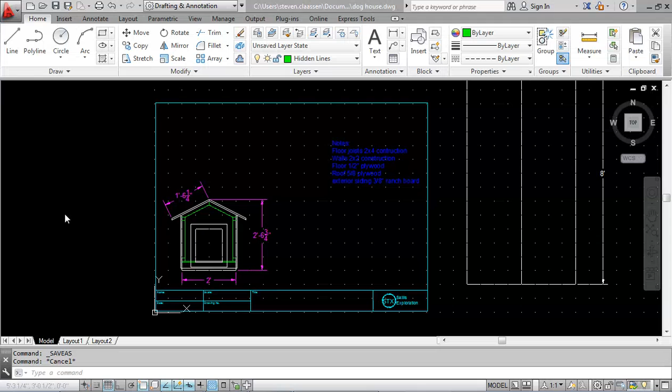This is the third part of creating a drawing for a doghouse. In this drawing, we're going to draw the side view of the doghouse.

First, to get started, I've figured out and finished off some of the inside hidden lines. These are like 2x2s that are going to be used to build the doghouse. You can see there's 2x2 walls here and a 2x2 to support the roof up there. Now you can add these in, and we'll talk about these in class as well.

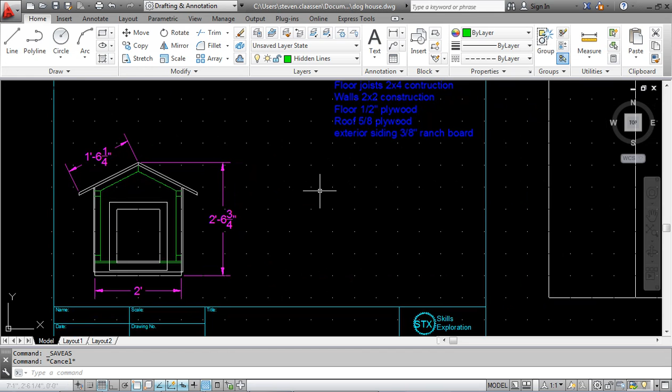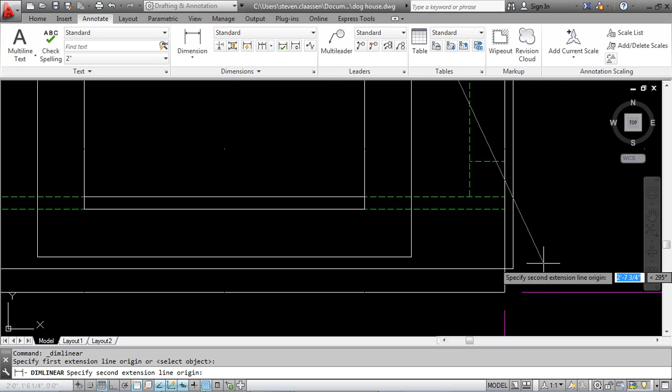So the next part is, how tall is this right now? Because we're going to go back to our sheet of plywood for a second. I'll switch over to dimension line, go to annotate and dimension linear. I'm going to grab from right here at the top of, or the inside of the plywood, and go down to, careful here, I want this line right here because that's the bottom of the plywood. That's going to be used for the siding.

So there's 2'5", that is 2 foot, which is 24 inches, and 5 inches, so that's 29 inches. Let's just put that right there, and we'll take this one here and move that one out a little bit further. Why is this one important? Because when we use a sheet of plywood, we don't want to waste the plywood. So 2 foot 5 inches.

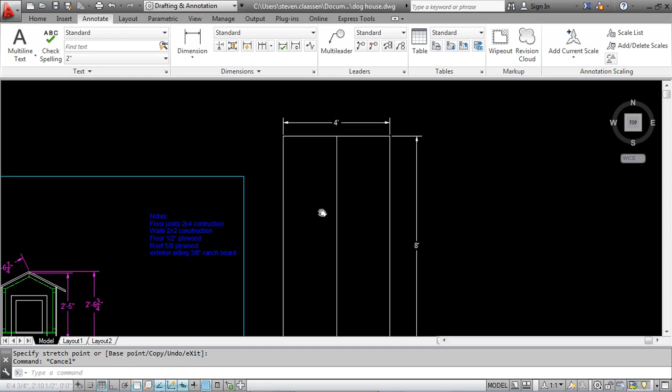So I'm going to come to my sheet of plywood and type in offset, and it's going to be 2 foot 5 inches. I can then take this piece of plywood, this here, and go to here. Now I'm going to label this and just type in text and specify start point right there, and it's going to be 2 inches high. I'm going to call this one the front.

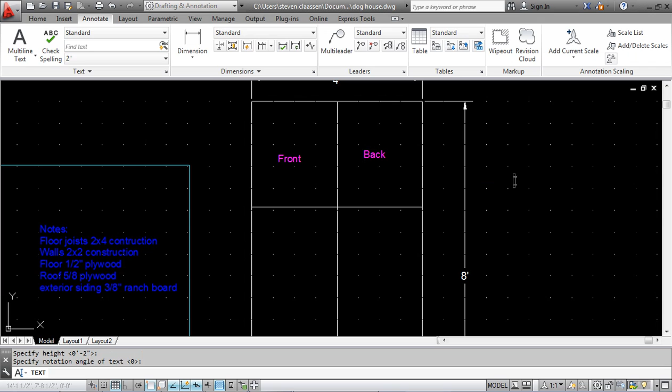I'm going to do text again right here, and 2 inches there, and I'm going to call this one the back. What I'm also going to do right away is just dimension it. Let's go to dimension, and from there to there now is 2 foot 5. So 8 minus 2 foot 5 now, that's how much less we have.

Now, what else is coming out of this sheet of plywood? It's going to be the walls. If I zoom in a bit here, I can again just move this further out so that we have some space here, do like this, and dimension it. I can zoom in and say, where's the highest point on the wall?

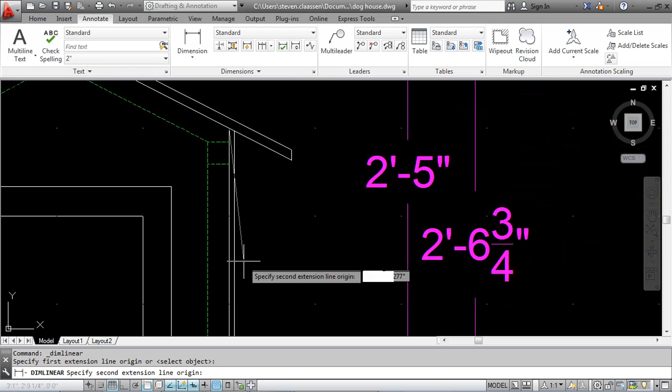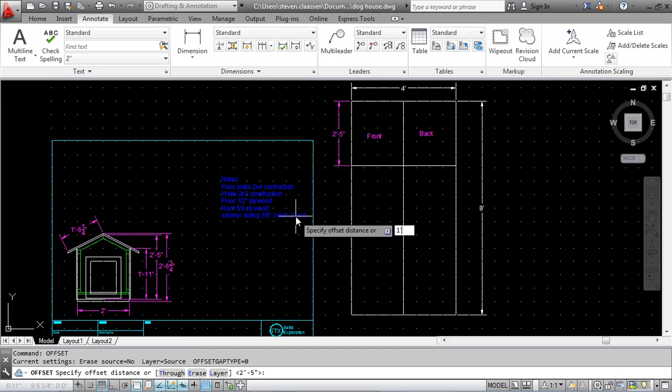Well, the highest point on the wall is right there, and the lowest point of the wall is right there. Then we can zoom out a bit, and we can grab 1 foot 11 inches is how high my wall material is. So I can come over to here and type in offset, and I'm going to type in 1 foot 11 inches.

I'm going to offset it once, and I'm going to offset it again. What I'm going to do now is just trim out the lines here and say, well, I really don't need between here and here. I'm going to get rid of this line here.

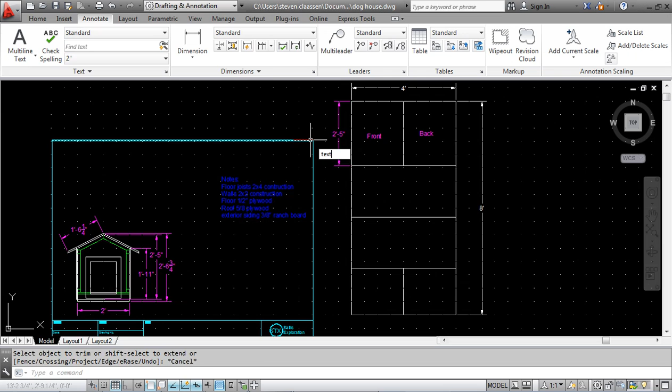Okay, hang on, let's try that again. So, text, specify the start point, height there, and type in side, and then I'm just going to copy this. Typing copy, specify base point, and I'm just going to put that there. Okay, I'm actually just going to get rid of this. And this down here is now going to be, let's type in text, and we're going to start it here, and height, and this is going to be my scrap.

So I'll dimension it right away, just go here to here. So there's 1 foot 11, and again from here to here is 1 foot 11, and then from here to here is 1 foot 9.

So in this doghouse, the way I'm making it, I have the front and the back, which are that high, the 2 sides, which are that high, and I got scrap of almost 2 feet. So you can see that if I was to adjust this height of the doghouse a little tiny bit lower, what I could have is maybe this would be 1 foot 10, 1 foot 10, this would be 1 foot 10, and I could get a whole other side out of the plywood for another doghouse. This is called your cut list, basically.

Okay, and you're laying out your sheet of plywood to see what you're actually going to use. Remember this, because you don't want to waste a lot of plywood when doing these things, and that's why it's important to lay out your plans.

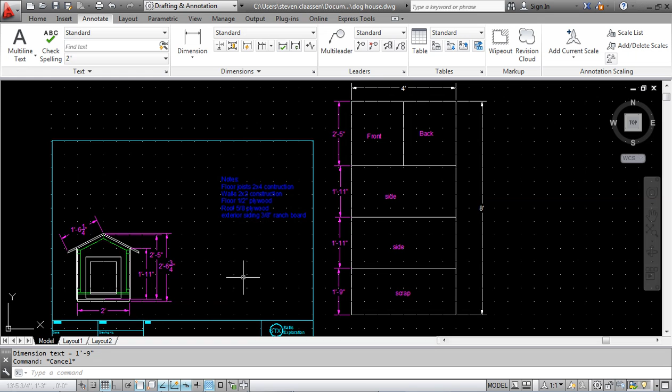Okay, so now that I've done my plywood layout, I know I've got 4 feet deep here, so my doghouse could be 4 feet deep. I'm not quite going to make it that deep. But we're going to draw now the side of the doghouse.

So to draw the side of the doghouse, this is kind of a trick here. I'm going to go back to home, back to my object layer, or object lines, and I can go line. Now just watch this. I'm going to hold here for a second, and then I'm just going to come over here, and it automatically puts a line in.

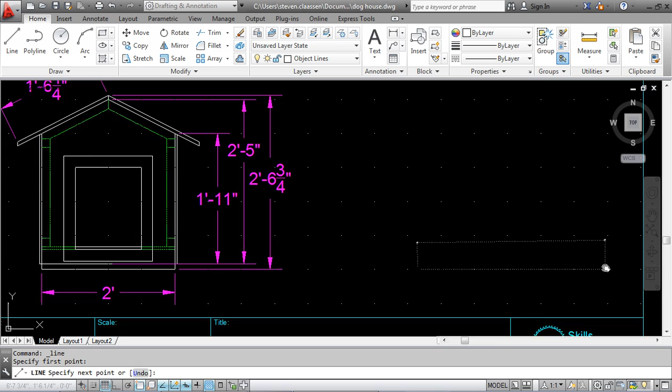And then I'm going to continue my line and say my doghouse is going to be, let's go with 3 feet deep. So I'm going to say 3 feet at an angle of 0. Okay, so there's that one. And then I hit escape.

Then what I'm going to do is take the line over here, and I'm going to take the very top of my doghouse. Let's just zoom out here for a second. Just get right there, hold it there for a second, and then it's going to come across here, and I'm just going to go across like this, and again, 3 feet at an angle of 0.

Oops, I kind of just goofed that one, so let's try that one again. So go line, and grab it here, right there, and I'll get it right there, and then go across, pick it there, and go 3 feet at an angle of 0.

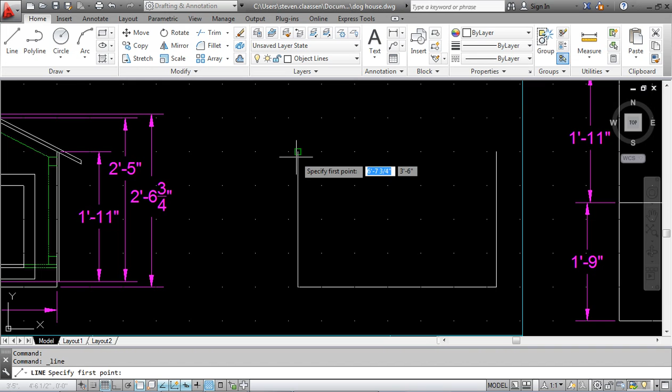Okay, that actually doesn't matter, because what I'm going to do is take a line now here, and go up like this, and then I can actually go offset, and I'm going to go 3 feet, and go from here, go this way, there we go. I can actually just take this line, delete it, and now just go line, or you could have extended it. So there now is from the top to the bottom.

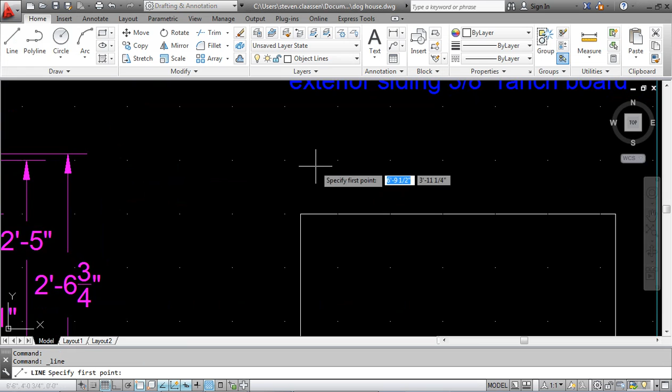Then what I can do is take again the line, go here, and this time around, let me try it one more time, go line, hold it there for a second, then come over to here so you can see how that happens. Oops, and I can't move it apparently. So let's just zoom out a bit.

So I'll take a line, hold it right there for a second, then come over to here, and I'm going to start there and just go this way for a bit. Okay, let's just go with F8 to turn on ortho. Oops, it's going to make me do it. So 3 feet at an angle of 0. Okay, so there's now the height of my doghouse.

And that's the last one I want to use right now. I'm going to go line, and grab the very bottom of this, and come across to here, and I'm just going to go again, let's go 3 feet. You don't have to be 3 feet, I'm just using this as my number. Okay, so those are my heights now.

Now what I can do is I'm just going to move this. M for move, and I'm going to move this over a bit. Oops, let me try that one more time. So M for move, and I'm going to highlight all this stuff and click on that. Right mouse click, move over a bit.

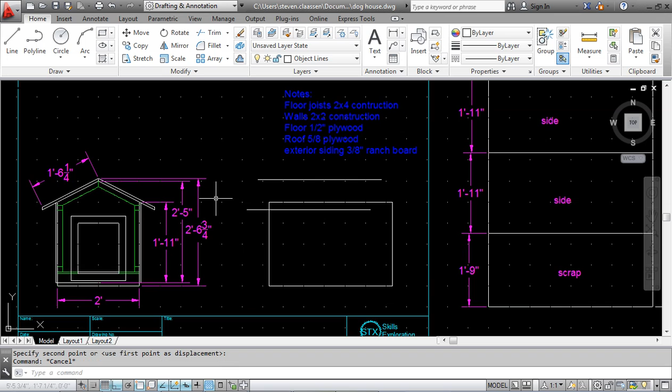Okay, and then now what I can do is again go offset, and I want my doghouse front and back to have a 6-inch overhang. So I'm going to say 6 inches. Again, you're making all this up yourself, just so you know if you don't know this. So offset one more time, 6 inches, not 6 feet.

And do this that way, and then do this that way. Okay, take this line, and I'm just going to extend it longer. Okay, like this, and I can just drag these like that. And then I'm going to go extend.

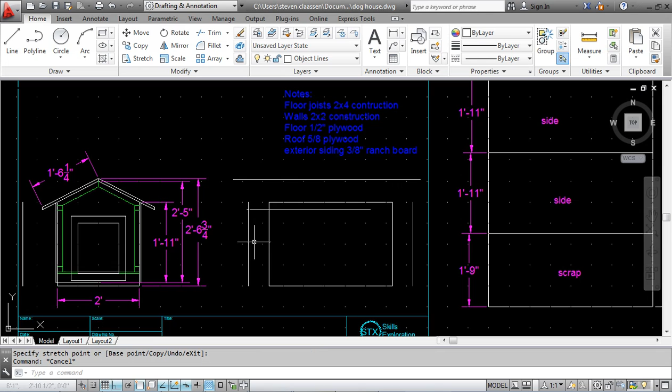And then I'm going to take this line, take this here, and that line goes up there, that line goes to there, and extend one more from here, right mouse click to there. Okay, and then I can trim off and say, okay, well I don't need the excess of that and that.

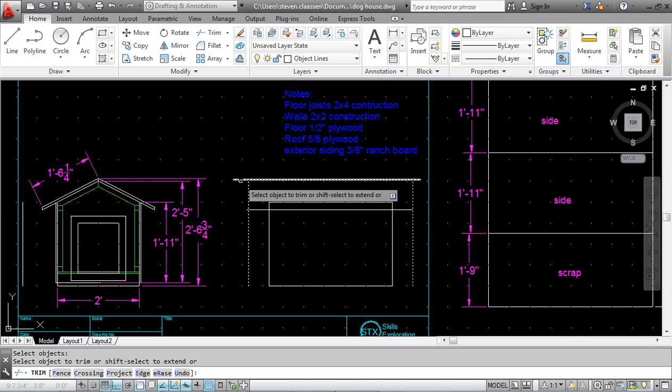Right mouse click, so I'll get rid of that. I'm going to zoom in here and get rid of that little bit right there, and get rid of that little bit. Okay, and all of a sudden now, trim one more time.

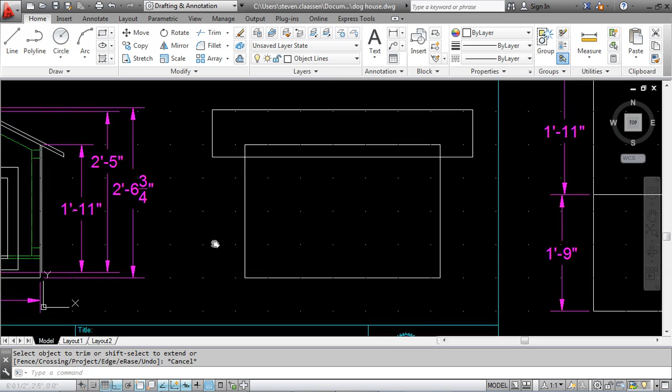Take this line, right mouse click, trim there, trim there. Okay, now all of a sudden I'm having my side view of my doghouse, and a couple other lines I can transfer over the siding line. So I can zoom into here a tiny bit and say, okay, well there's my siding there. So I would put it to there, and then I can go to the end right there. Okay, so there's the end of the siding.

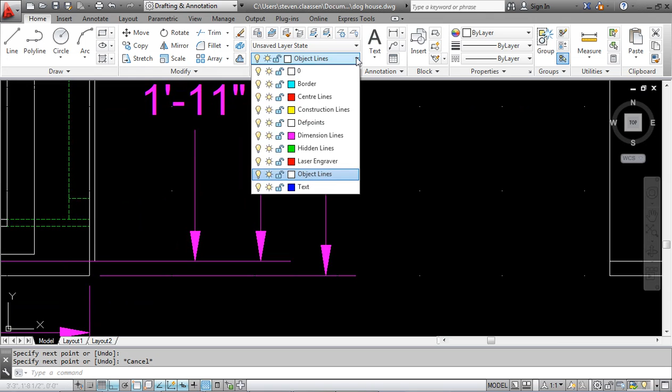Okay, I can take my hidden lines, and what I'm going to do is I'm just going to change the hidden line right away. And then I can take a line, pick that one there, and come across here - no, it won't, sorry. Let's try that one more time. Line, pick that line right there, hold it. It goes to there. Now I can come across and finish my hidden line off.

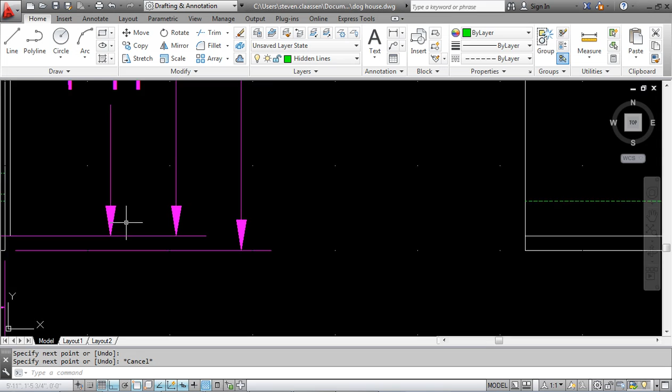Okay, and then same thing for the plywood, the top of the plywood. Go line, pick it here, hold it long enough. No, I can't do that. Yeah, I can, there you go. And then go across to here. Okay, and I just continue on, and next thing you know, I'm going to have the side views.

This here you can't see, so what I can do in this one, I think I can just type in break this time. I'm going to pick this line here, and it's going to ask me to break right there. Okay, and I'm going to do this one more time, pick that, and I'm going to break right there.

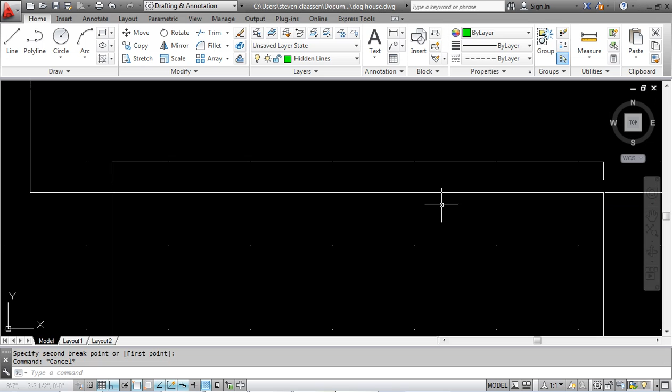And I'm just going to type in extend, and pick this one, right mouse click, extend that one, whoops, extend that one. Okay, and then I'm going to highlight this one because it's been broken, and that one, and that one, and then I'm going to change that to hidden lines.

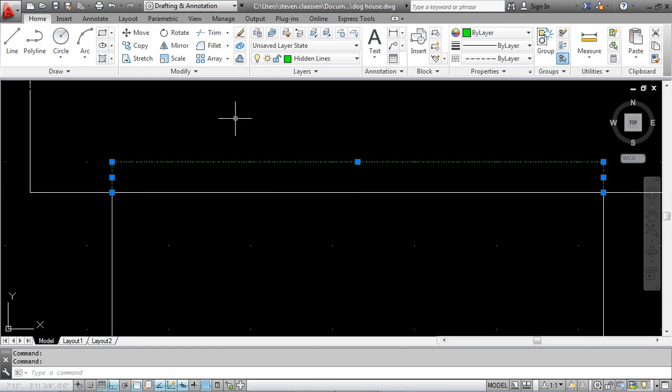Okay, so slowly I'm making my doghouse side view. What I'm going to do then is add my 2x4s because I'm going to have some 2x4s in there, and basically finish it off.

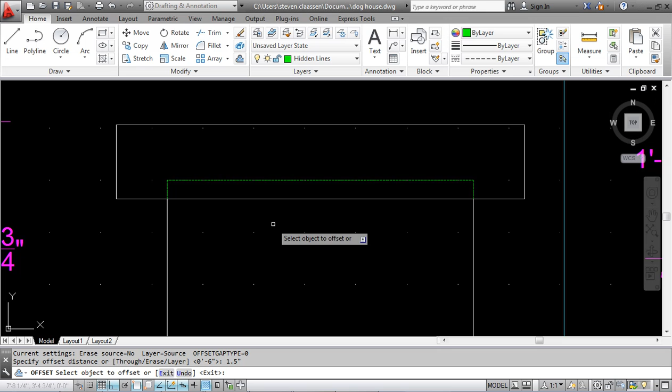So if I just zoom in here, I'm just going to type in offset, and it's 1.5 inches. So I'm going to have a 2x4 that's at the top there, and I'm going to have the 2x4 bottom that's going to be there, and then from there, and then here, and then I'm just going to pick these and change those to hidden lines.

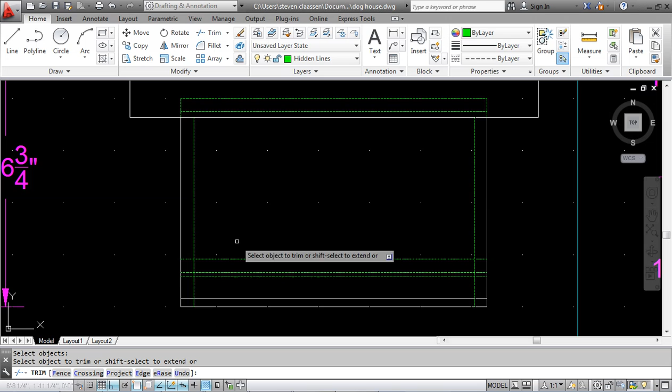And then I'm going to trim off because they're going to be trimmed off to here. So I'm just going to take this line and trim all that out, trim all that out, and then here I'm going to type in extend. Whoops, there we go. And I'm just going to take this one, right mouse click, extend this one here, extend one there, and there's my side view of the internals of my doghouse.

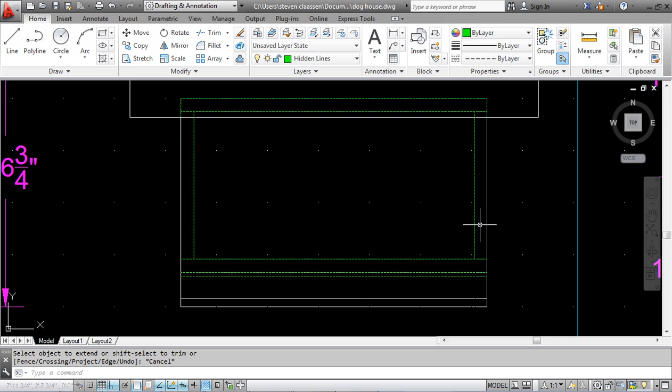So there's my plywood sheet there, right? There's my 2x4 for my stud, or sorry, my bottom plate. There's my studs. There's my top plate.

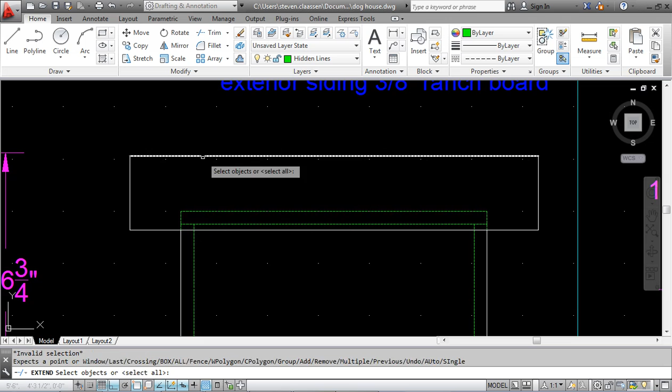And just to show that there is a frame up top, what I'll do is I'll type in - first off, extend, let me try that once more. Extend, and I'm going to extend these lines to the top. So right there, right mouse click, put that one, that one, that one, and that one.

Okay, so this is going to be a little hard to see, but basically that there is the 2x4s from these ones right here that are at the front and the back to hold up the plywood when you nail the plywood on, because you got to nail the plywood onto something. So there's got to be 2x4s there for it to nail onto.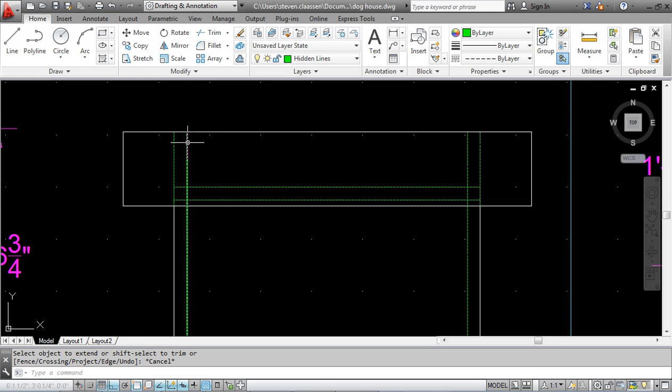Okay, so that basically is completing it, other than doing some dimensions. And once again, dimensioning it, I would probably go and change this to dimensions, and I'm not going to dimension all of it, but you have to figure out what do I need to actually build this. So I probably need to know how far that is. So 4 feet, that's good, because a 4-foot sheet of plywood would work then.

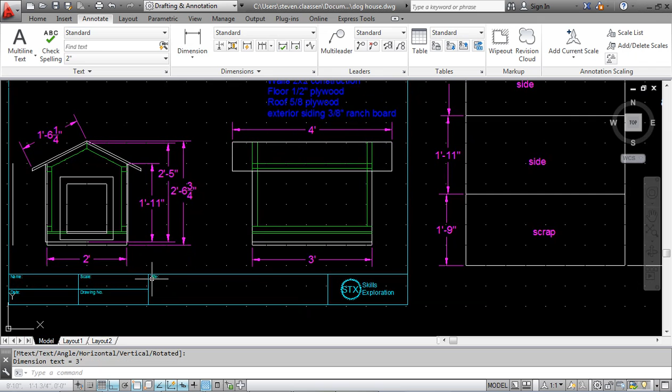Okay, and I probably want to know the distance this way. Okay, and it's 3 feet, right? And I don't need to know the height here to here because it's on an angle, that plywood, right? So basically I don't need to know much more than 3 feet and 4 feet because all the other dimensions are kind of over here.

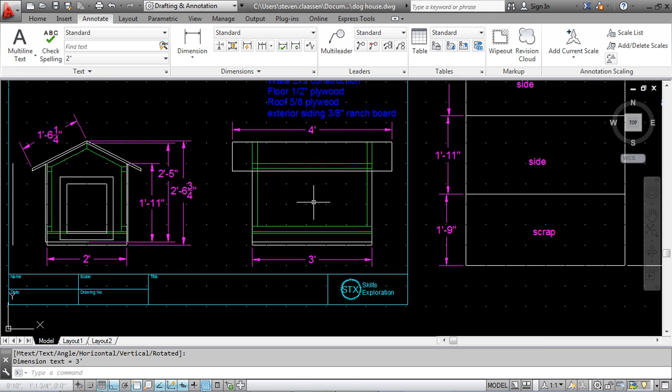This just shows you internally that there's where the 2x4s go. Do I want one in the center? I could put one in the center. Do I want in here? This is 4 feet across. Do I want to nail the plywood on more than one spot? Probably. So the last thing I'm going to do is I'm just going to type in offset.

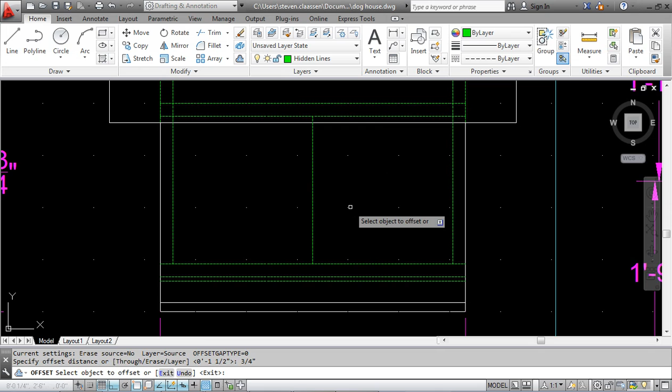I'm going to do a center line. I'll go back to home, back to hidden line, draw a line here, and there's my center point. I'll put a center line to there, then go offset - half of 1.5 is 3/4 of an inch. I'll go from here to there, delete this line, and there we go. Now it shows there's a 2x4 in the middle, because otherwise you wouldn't know that. That is basically my set of doghouse plans.

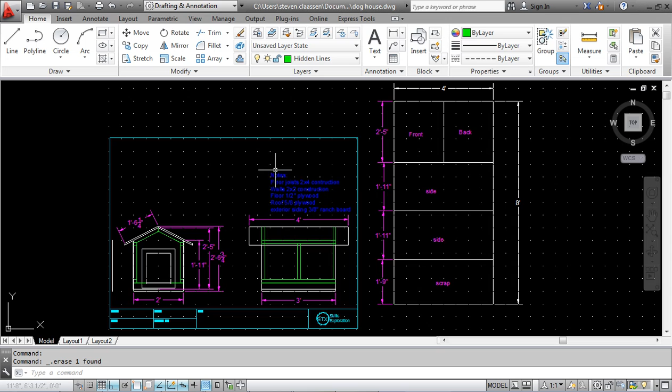There's my cut list, so I know it's all going to fit on a sheet of plywood. This stuff here, I'm just going to move up top using M for move, pick a point here, so we know what all the siding and stuff is. Down in here, let's fill in - I'm only going to fill in certain aspects. Border, so my name, the date, drawing number is 1 of 1 because there's only one drawing, although we might have 2 drawings here.

Scale, this is the important one. So type in text now, it's going to be a starting point. Let's go right here, and the height is going to be 2 inches. I'm not sure why I got ortho on, let's turn that off. Text angle 0, and my scale is going to be 1 to 12 this time, it's going to be 1 inch, basically to 12 inches.

Or you could say it is 1 inch to 1 foot. Okay, that's right, 1 foot. This should be 1 inch, let me try that once more - 1 inch to 1 foot. So every inch that I measure on here is 1 foot in real life, or I can just say 1 to 12. I'm going to leave it as 1 inch is 1 foot. So there'd be my scale.

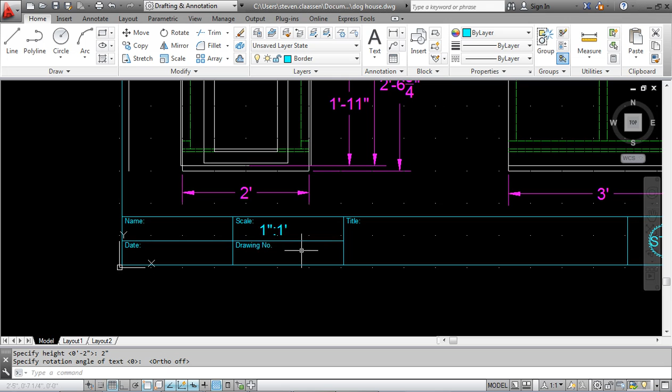Everything else would be filled in. My title would be Doghouse in bigger font, and then all I would do is save it. Go File, Print, and here's the kicker - we got it all set up. Extent scale is 1 inch to 1 foot. I'm going to go center, then go preview.

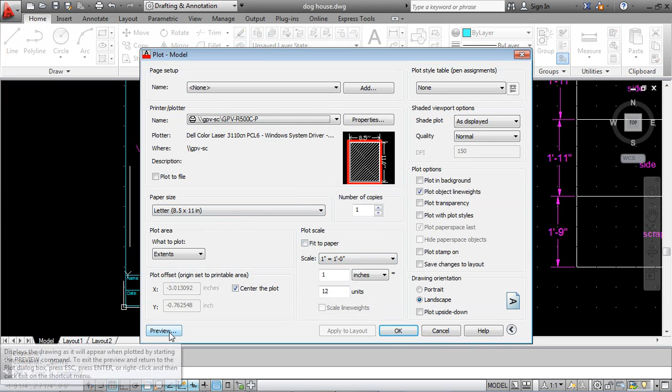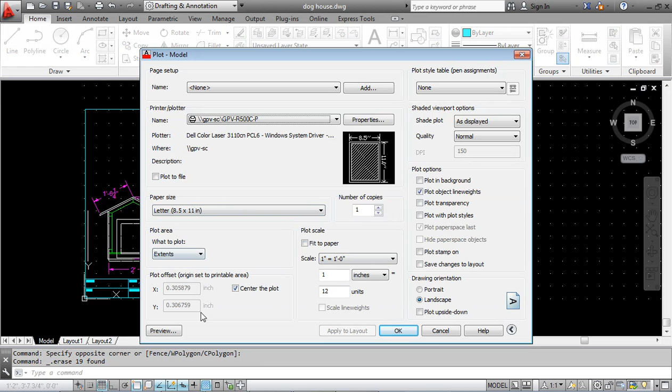Now here's the problem - when I do this, I have this plywood over here. Well, that's not going to help us, right? So what I'm going to do is take this piece of plywood and delete it for a second. Then when I do this, go File, Print - that's all set up, and I go Preview, and now you're going to see it all fits nicely on, and I got a scrap extra line there. All my colors are in there so I know all my different layers, and then away we go, and we can actually go build it.

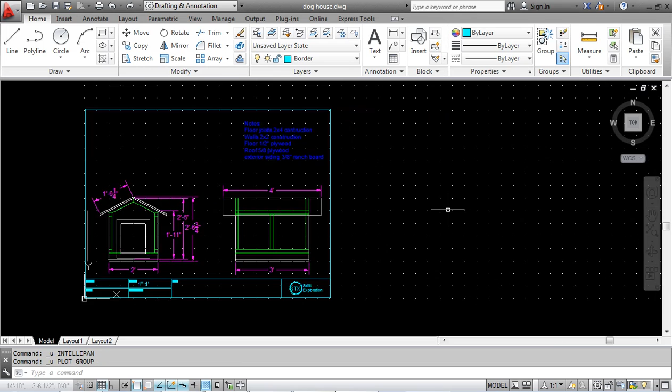Okay, so that pretty much completes this entire tutorial as to how to design a doghouse. It is completely up to you what you actually draw, but the bottom line is, when we do this, it cannot use up more than a sheet of plywood, and hopefully you've used up all of it and you don't have a bunch of scrap.

So the only thing I didn't do is 3 feet. So on here, offset - okay, I'm going to take 3 feet and offset it from this way. I'm going to go trim, and I'm just going to get rid of this one right here. Then trim this one basically right here. And then one more, trim this one from right here to right here.

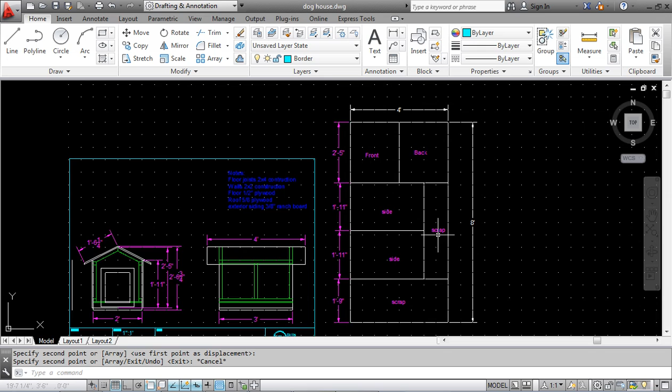So there we go. So then I can take this one and go copy from here, and I'm going to put that one up there as scrap as well. So there seems to be a lot of scrap plywood out of this piece of plywood to make this doghouse. So in reality, the size that I made this might not be very conducive because there's a whole bunch of scrap left over. And this little 1 foot piece can't be used for anything. This piece here, if we adjust it, we could actually start another doghouse and use that. So you get to play a bit.

Do not copy this exactly, but know that there is a finished set of plans for you. And that concludes this tutorial.